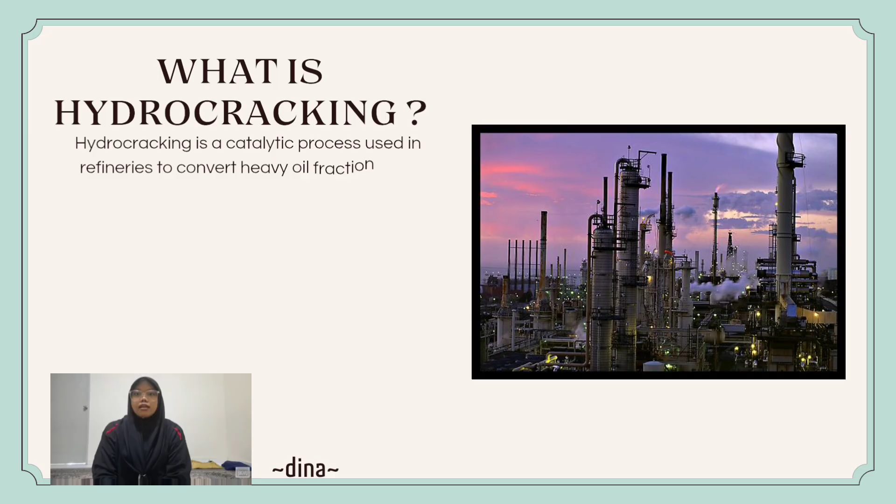Hydrocracking is a catalytic chemical process used in petroleum refining to break down large, complex hydrocarbon molecules into smaller, more valuable products such as gasoline, diesel, and jet fuel. It involves the addition of hydrogen under high pressure and temperature, which helps convert heavy oils and residues into lighter fractions. This process is essential because it helps meet the demand for cleaner fuels and optimize resource utilization. The hydrocracking unit typically consists of reactors filled with specialized catalysts that facilitate this chemical transformation efficiently.

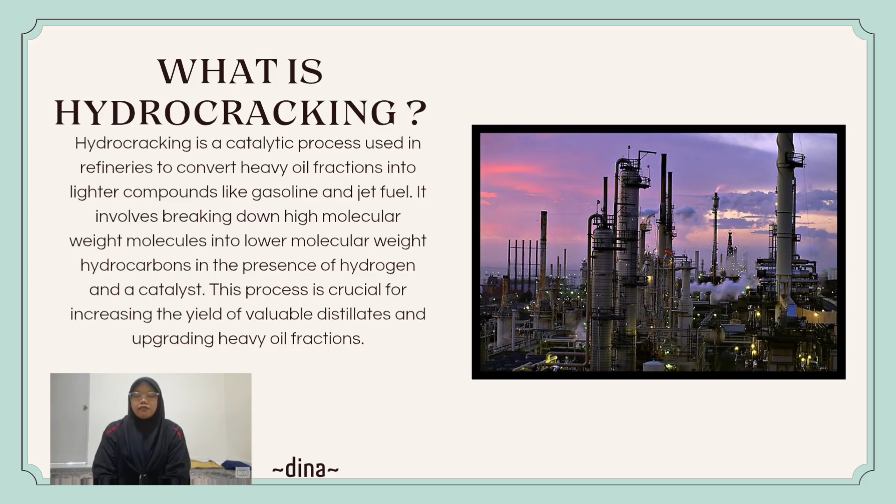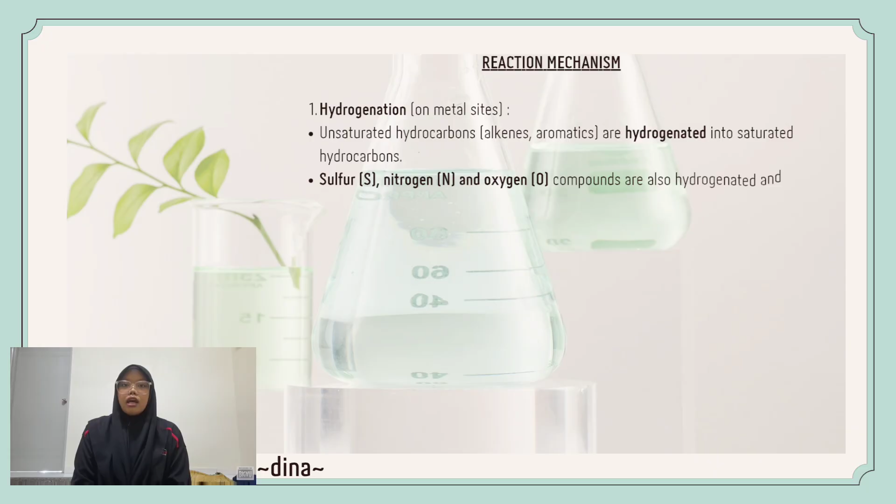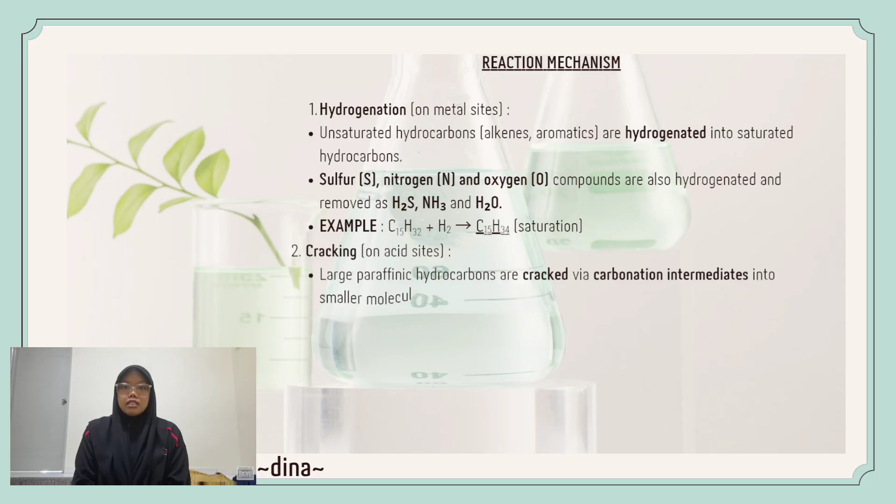For this slide, I want to explain three essential reaction mechanisms employed in the petroleum industry to enhance the properties of hydrocarbons. First, hydrogenation. Hydrogenation is the process of adding hydrogen to unsaturated hydrocarbons, which typically contain double or triple bonds. This reaction occurs in the presence of a catalyst, often a transition metal like nickel, palladium, or platinum.

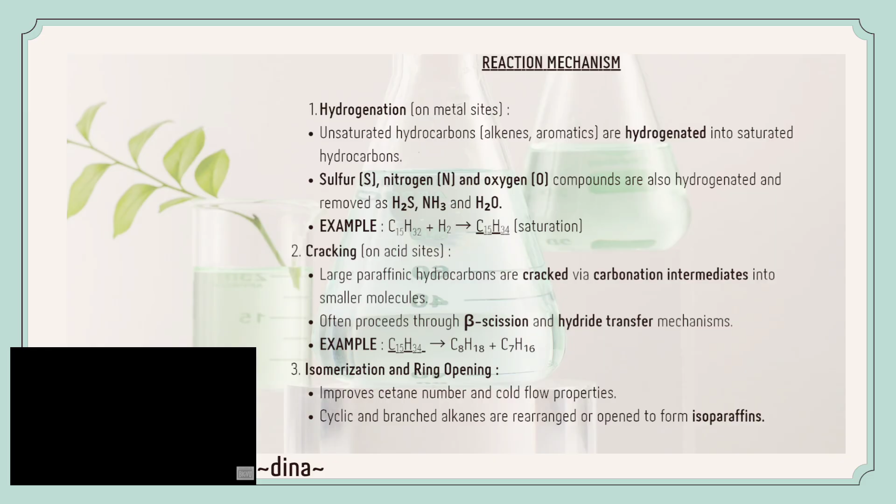The significance of hydrogenation lies in its ability to convert less stable, unsaturated hydrocarbons into more stable, saturated forms. For instance, the hydrogenation of pentene C5H10 can yield pentane C5H12. This process not only increases the stability of hydrocarbons but also improves their energy content, making them more suitable for fuel applications.

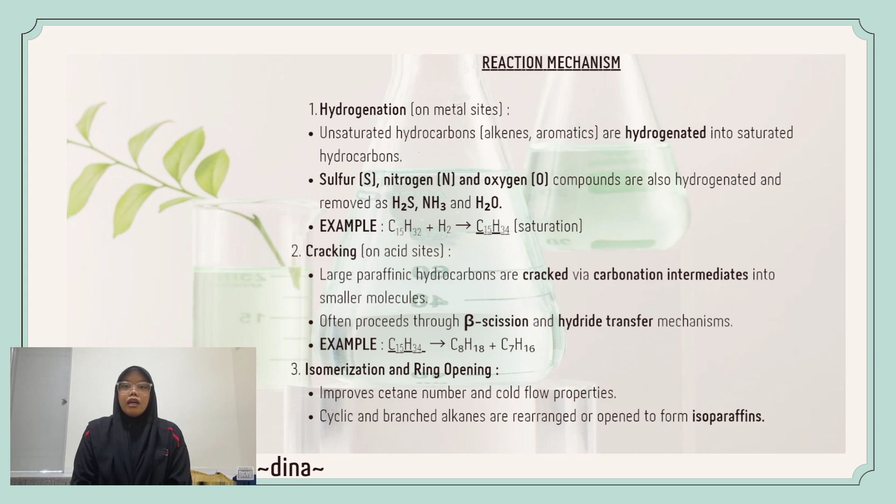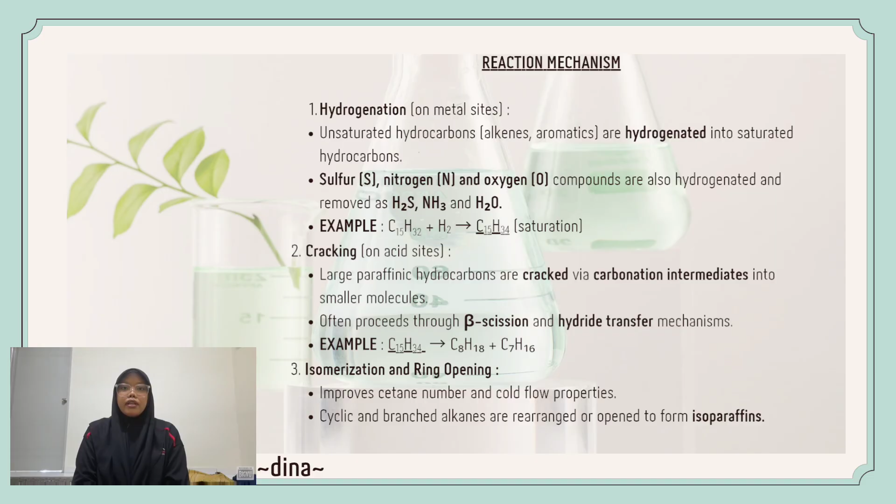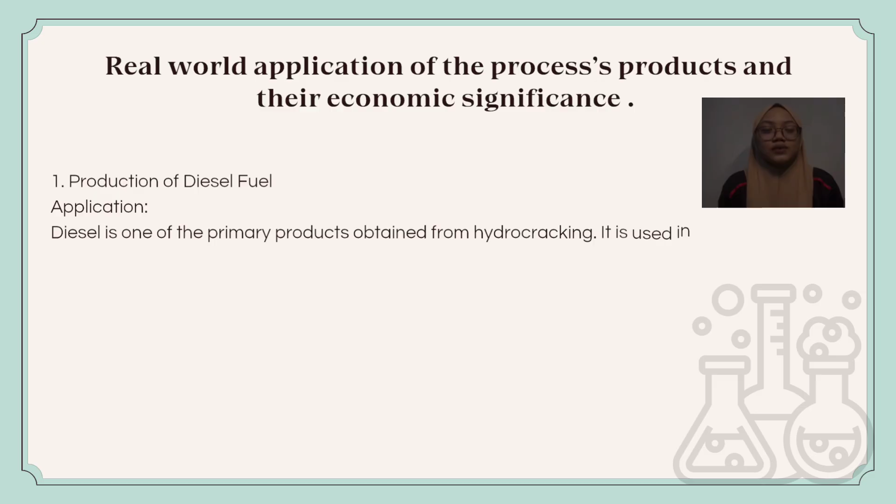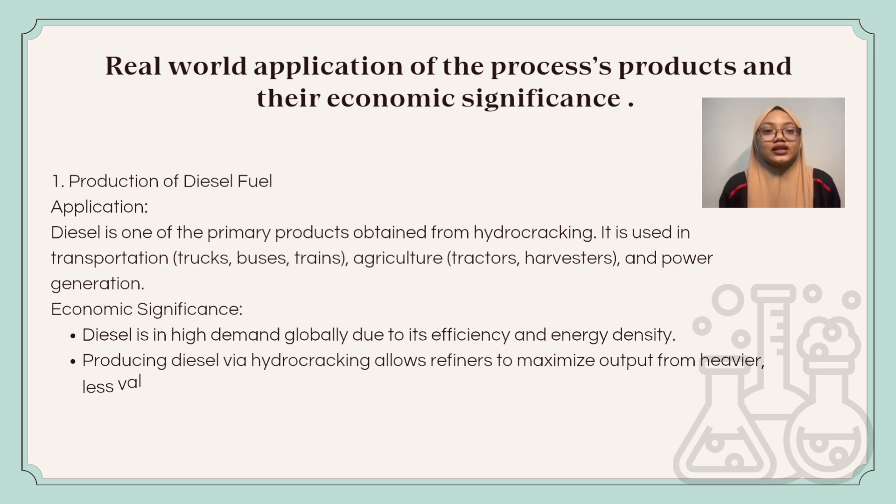Let's explore three key applications of hydrocracking products in real life and why they matter economically. First, we have diesel fuel, one of the main products of hydrocracking. Diesel is widely used in transportation such as trucks, buses, and trains. It's also essential in agriculture for powering tractors and harvesters, and even in power generation in some areas.

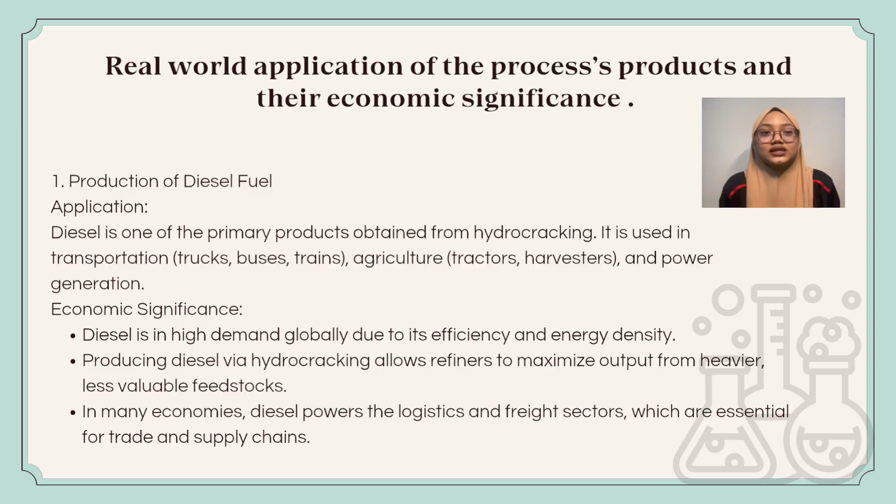Economically, diesel is in high demand around the world because of its high energy efficiency. Refining it through hydrocracking allows industry to convert heavier, low-value crude into profitable diesel. And since diesel fuels the freight and logistics sector, it plays a key role in supporting trade and supply chains globally.

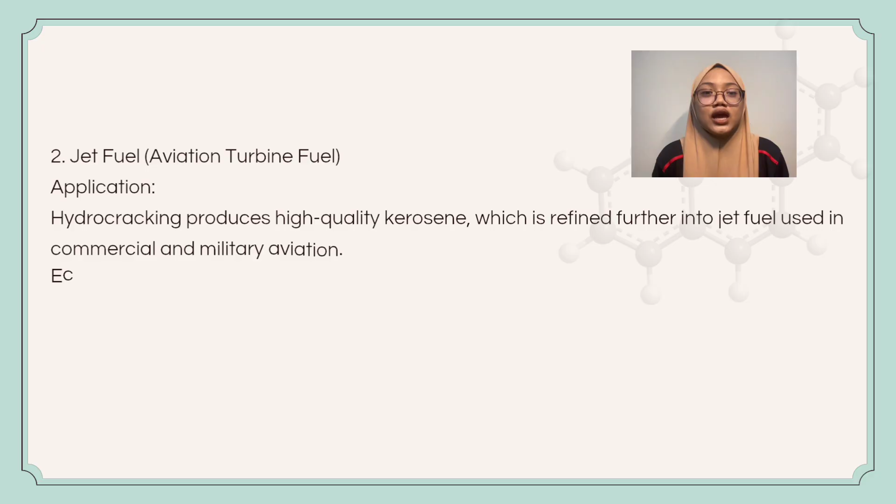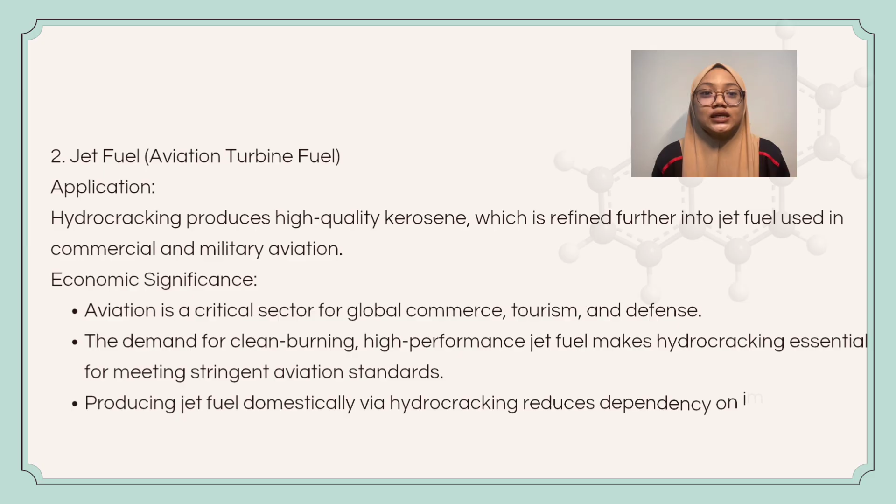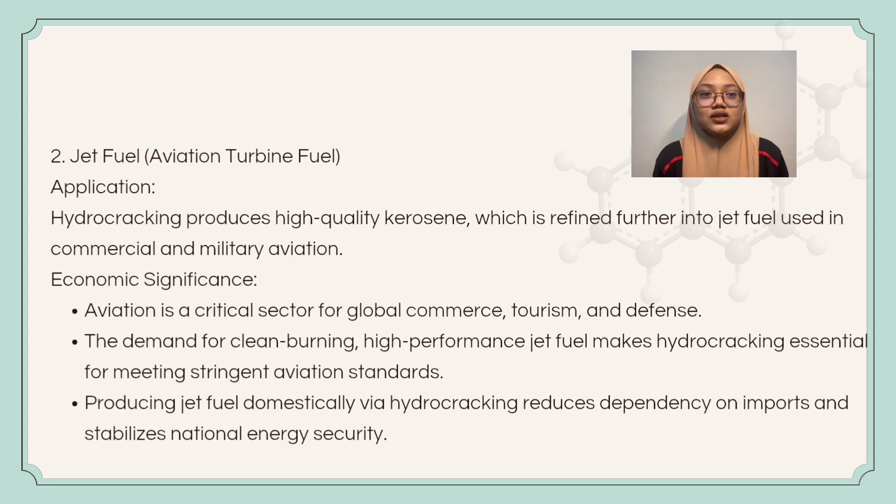Next is jet fuel, produced by refining kerosene from the hydrocracking process. Jet fuel is critical for both commercial airlines and military aviation. From an economic standpoint, the aviation industry is crucial for global commerce, tourism, and national defense. Hydrocracking provides the clean-burning, high-performance fuel that modern jet engines require, meeting strict safety and environmental standards. Producing jet fuel domestically also reduces dependence on imports and improves a country's energy security.

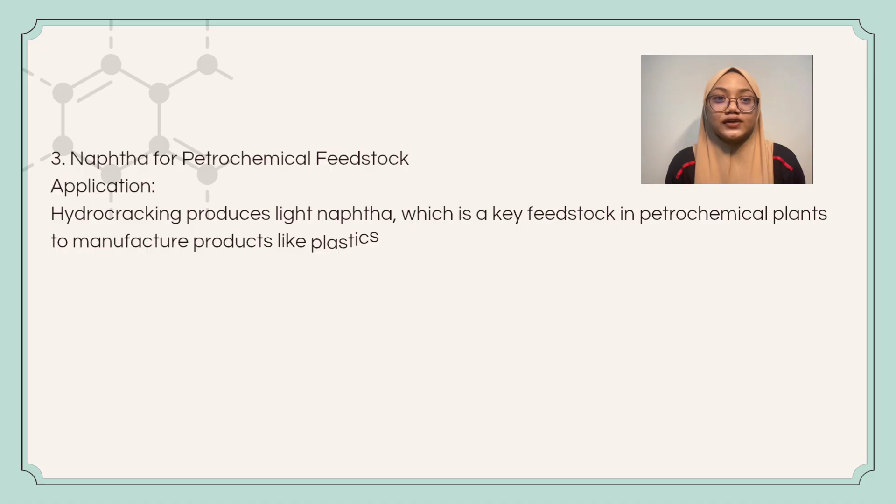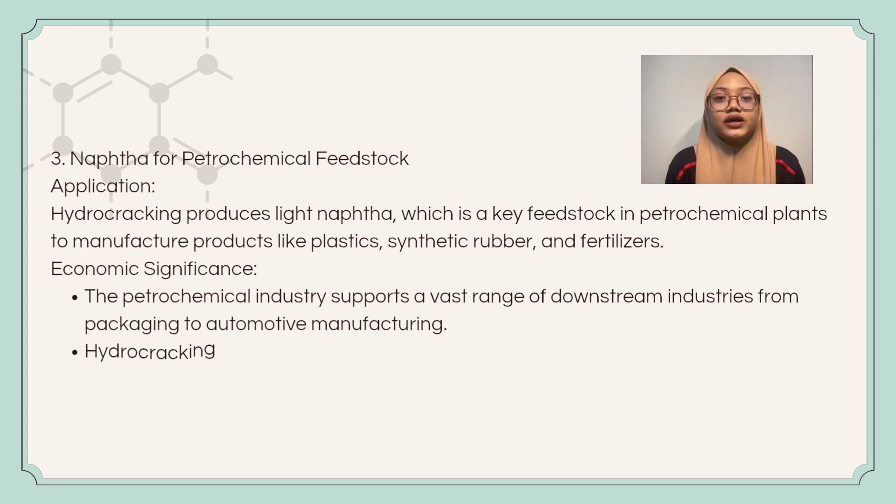The third application is naphtha, a light hydrocarbon used as a feedstock in petrochemical production. It's a building block for making plastic, synthetic rubber, and fertilizer. Economically, this is extremely important because the petrochemical industry supports countless other industries from packaging and automotive to electronics. Hydrocracking helps meet growing demand for naphtha, especially in countries with strong chemical manufacturing sectors. Converting low-value crude into high-demand chemicals adds significant economic value.

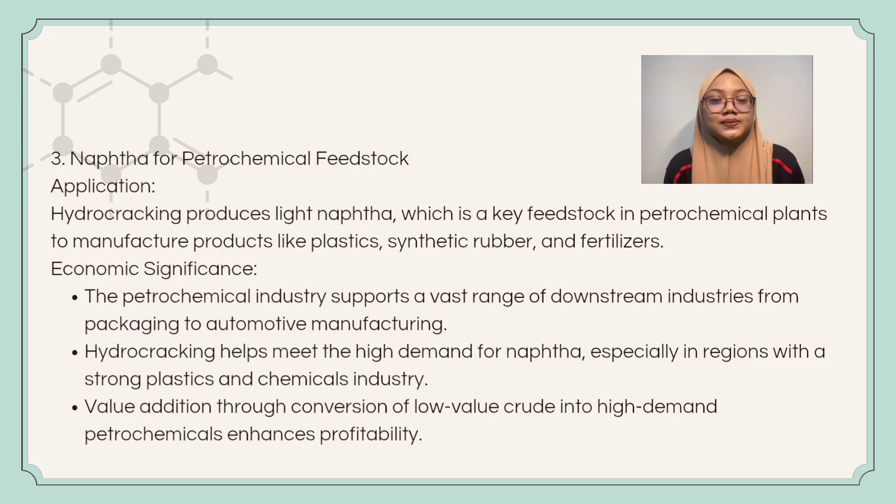Sustainability and environmental impact focus on the hydrocracking process, breaking it down into 4 main categories. Category 1 is waste generation. Minimal solid waste where the catalyst must be managed, such as disposed or regenerated. Wastewater includes ammonia, sulfides, and hydrocarbons. Byproduct gases like methane, ethane, propane, and butanes are produced but typically recovered and reused as fuel or feedstock.

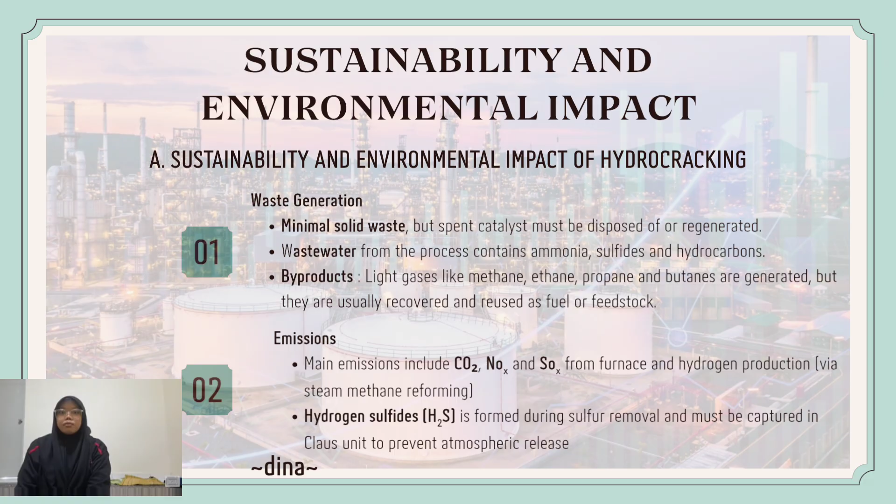Category 2, emissions. Major emissions, CO2 and H2S formed during sulfur removal must be captured in Claus units to prevent environmental release.

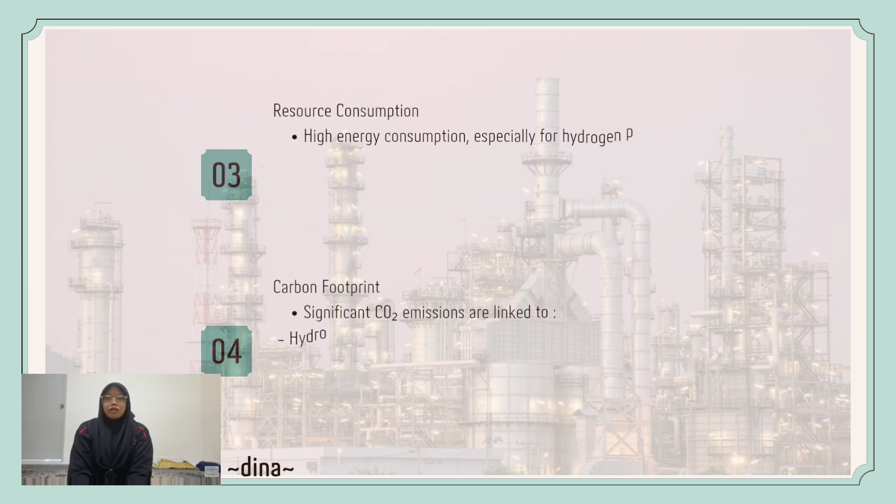Category 3, resource consumption. High energy consumption for hydrogen production and heating processes requires large volumes of water and cooling utilities, and a strong dependence on non-renewable feedstocks such as vacuum gas oil and residue oil.

Category 4, carbon footprint. Major CO2 emissions arise from hydrogen production, often fossil fuel-based, combustion in heaters, and use of fuels, especially in engine combustion.

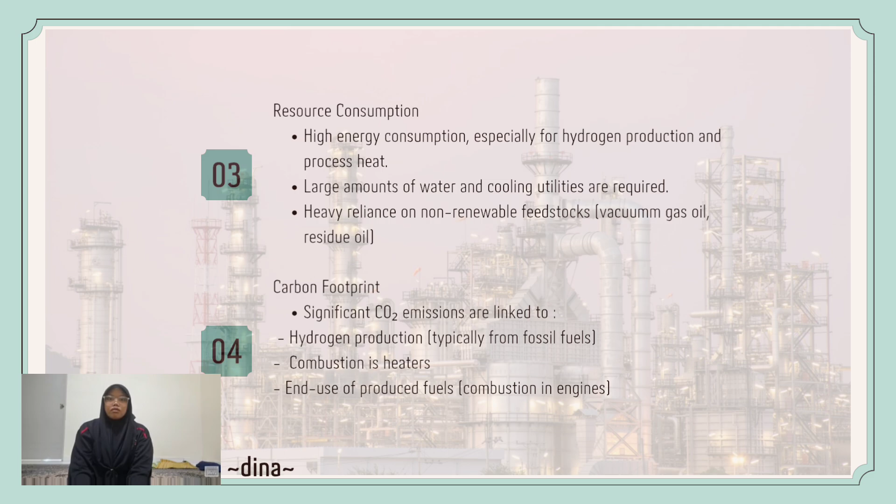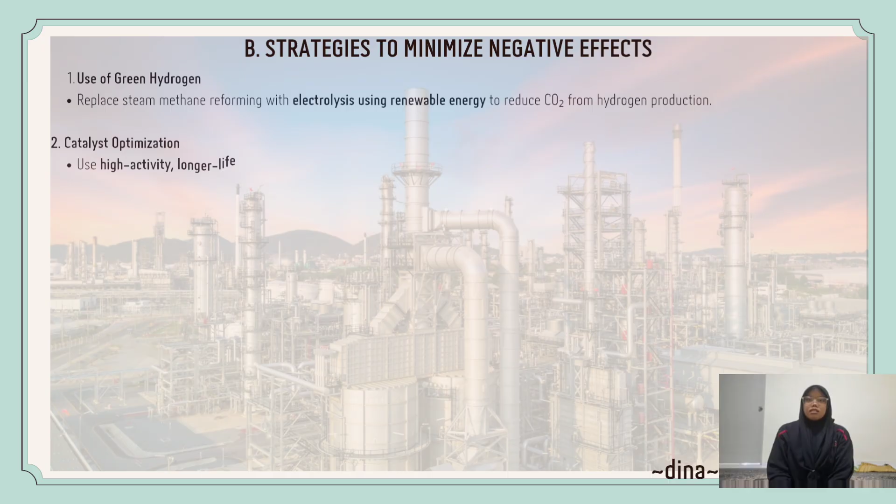This slide outlines strategies to minimize the negative environmental effects of hydrocracking. First, use of green hydrogen. Replace steam methane reforming with electrolysis powered by renewable energy to reduce CO2 emissions from hydrogen production. Number 2, catalyst optimization. Use high-activity, long-life catalysts to reduce regeneration frequency and waste. Recycle valuable metals such as nickel, molybdenum, and platinum from spent catalysts.

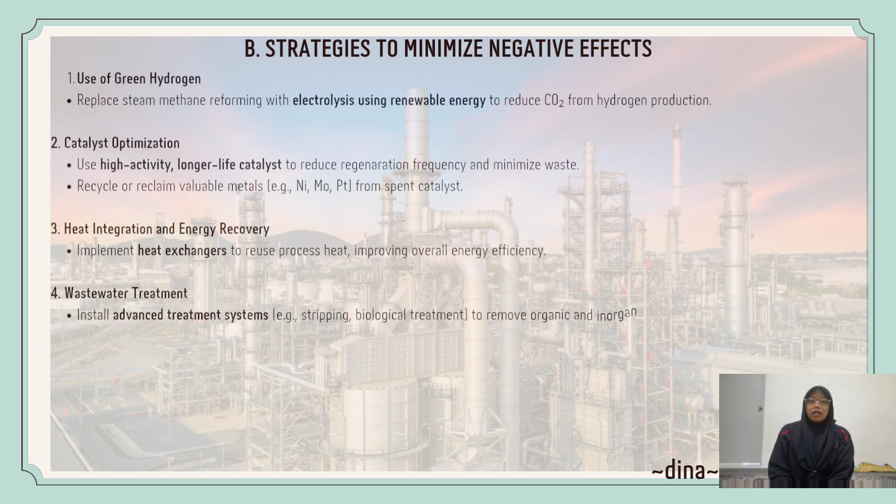Number 3, heat integration and energy recovery. Install heat exchangers to reuse process heat, increasing energy efficiency. Number 4, wastewater treatment. Apply advanced systems, for example stripping and biological treatment, to remove contaminants before discharge.

Number 5, CO2 capture technologies. Use carbon capture and storage (CCS) or carbon utilization to lower plant emissions. Number 6, feedstock diversification. Explore renewable feedstocks like bio-oils or used lubricants to reduce dependence on fossil-based inputs.

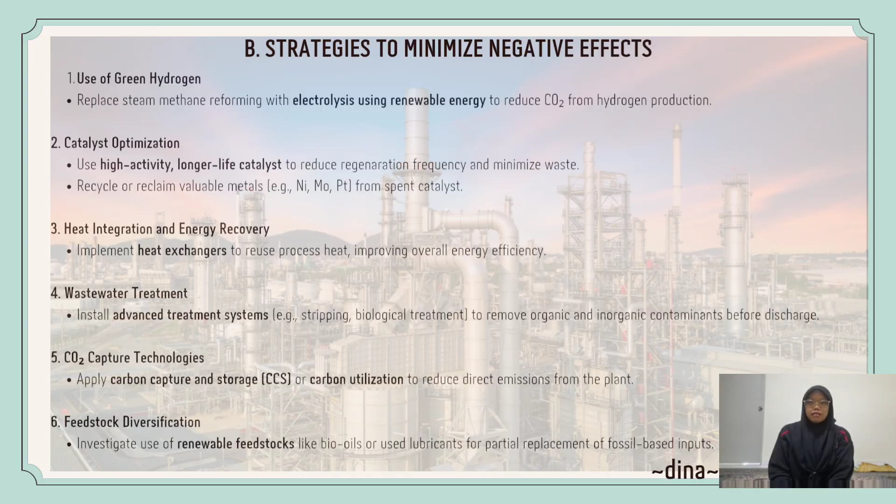33DPE24F1031. So now I will continue about the hydrocracking process for health, safety and legal consideration.

For health and safety consideration, first, chemical exposure. The process uses high pressure hydrogen and various catalysts which can be hazardous. Workers may be exposed to hazardous chemicals, so proper handling and storage protocols are essential to prevent leaks and exposure. Also, monitoring air quality and using appropriate PPE are essential.

Number 2, high pressure hazard. The process operates under high pressure and temperature, requiring robust equipment design and maintenance to prevent accidents.

Number 3, noise exposure. Equipment can generate significant noise which may affect hearing. Due to this, implementing noise control measures and providing hearing protection is important.

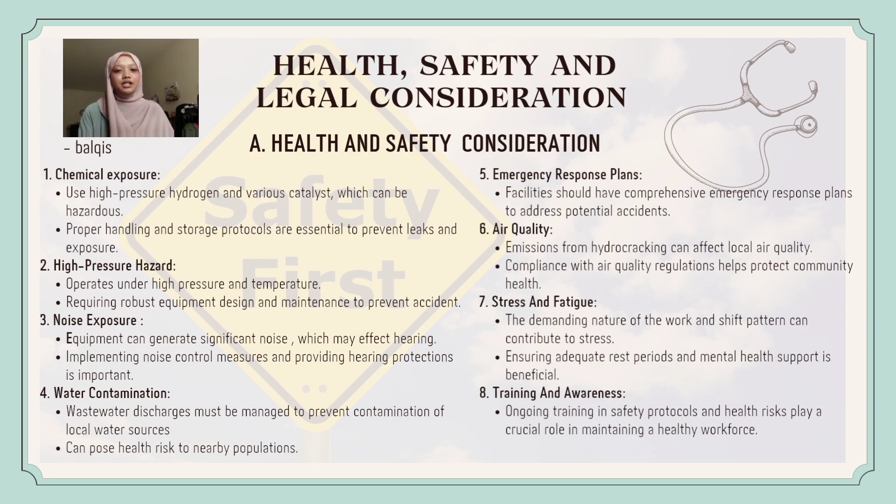Number 7, stress and fatigue. The demanding nature of the work and shift patterns can contribute to stress. Ensuring adequate rest periods and mental health support is beneficial.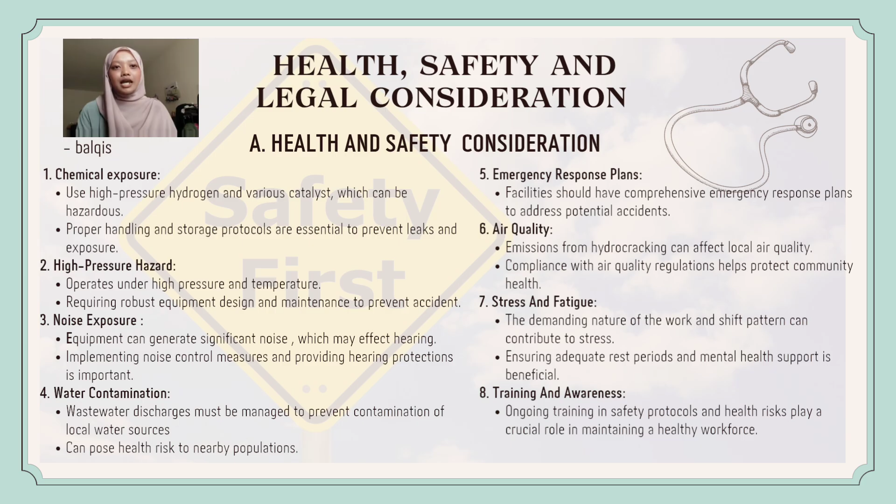Number 8, training and awareness. Ongoing training in safety protocols and health risks plays a crucial role in maintaining a healthy workforce.

Now about legal consideration. Number 1, regulatory compliance. Facilities must comply with regulations from agencies such as the Environmental Protection Agency (EPA) and Occupational Safety and Health Administration (OSHA).

Number 2, licensing and permits. Operating permits are often required and facilities must undergo inspection to ensure compliance with safety and environmental regulations.

Number 3, reporting requirements. Incidents involving hazardous materials or emissions must be reported to regulatory bodies as per legal requirements.

Number 4, process safety management (PSM). Following PSM guidelines helps in identifying, evaluating and controlling hazards associated with processes involving highly hazardous chemicals.

Number 5, API standards. The American Petroleum Institute (API) provides standards that guide safe practice in hydrocracking and related processes.

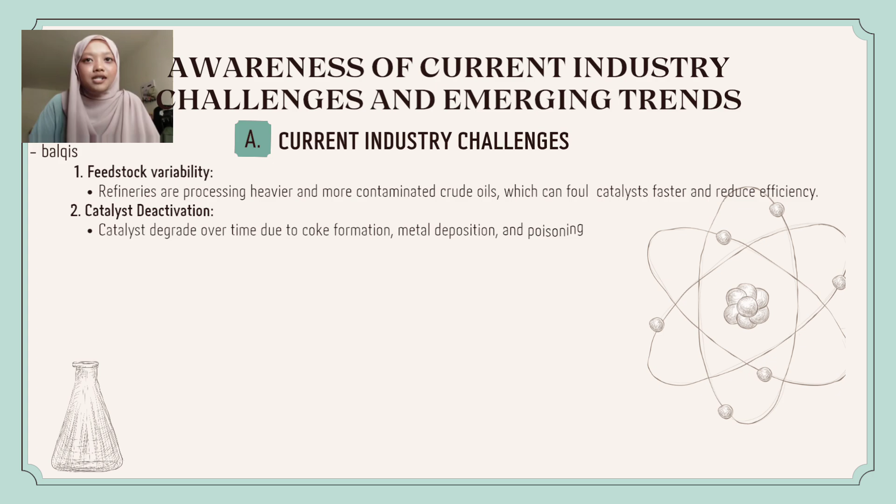About current industry challenges, firstly, feedstock variability. Refineries are processing heavier and more contaminated crude oils, which can foul catalysts faster and reduce efficiency.

Next, catalyst deactivation. Catalysts degrade over time due to coke formation, metal deposition, and poisoning, for example by sulfur and nitrogen compounds. Frequent regeneration or replacement increases operational costs.

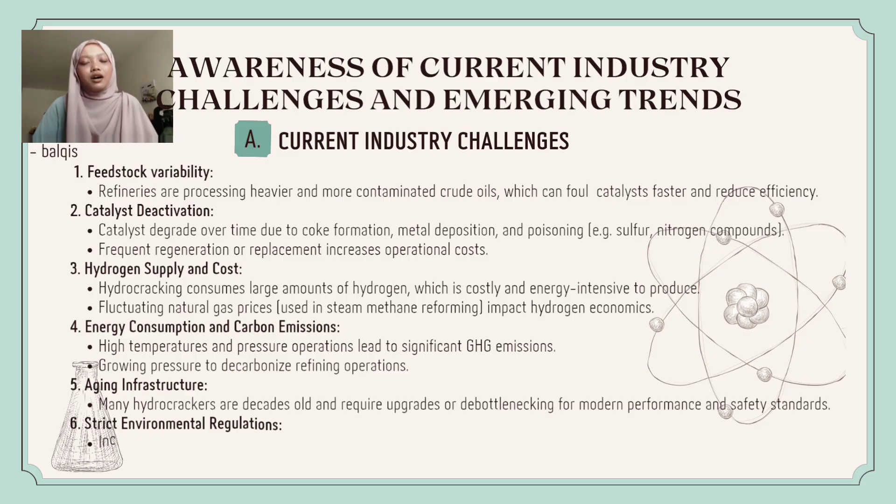Number 3, hydrogen supply and cost. Hydrocracking consumes large amounts of hydrogen, which is costly and energy intensive to produce. Fluctuating natural gas prices used in steam methane reforming impact hydrogen economics.

Number 4, energy consumption and carbon emission. High temperatures and pressure operations lead to significant GHG emissions. GHG stands for greenhouse gases, which include water vapor, carbon dioxide, methane, and nitrous oxide.

Number 5, aging infrastructure. Many hydrocrackers are decades old and require upgrades or debottlenecking for modern performance and safety standards.

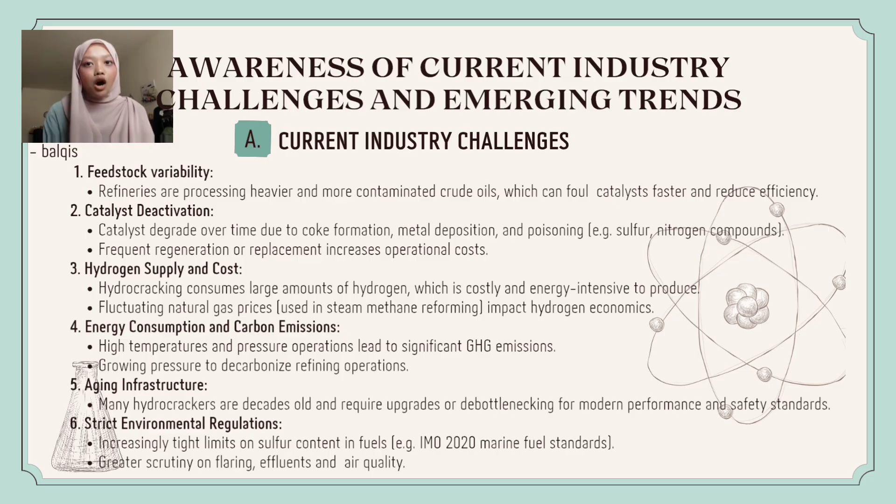Number 6, lastly, strict environmental regulations. Increasingly tight limits on sulfur content in fuel, for example IMO 2020 marine fuel standards, and greater scrutiny on flaring, effluent, and air quality.

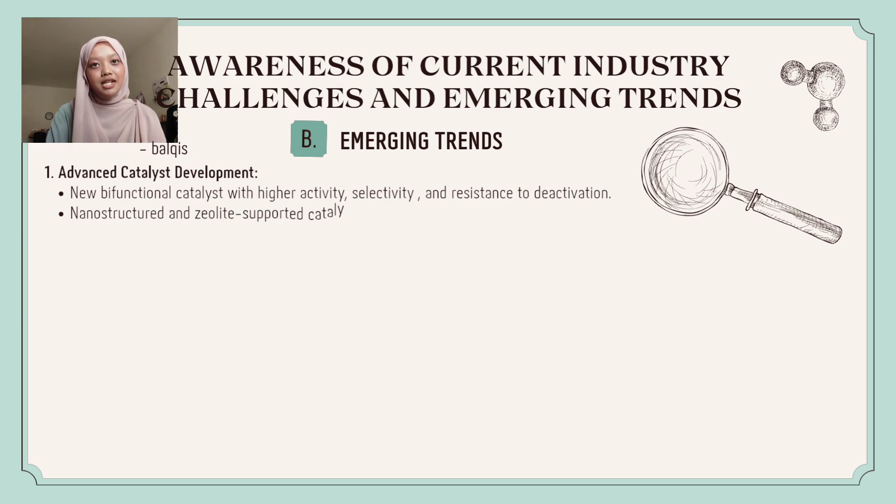So now I will talk about emerging trends. First, advanced catalyst development. New bifunctional catalysts with higher activity, selectivity, and resistance to deactivation. Nanostructured and zeolite supported catalysts are gaining interest.

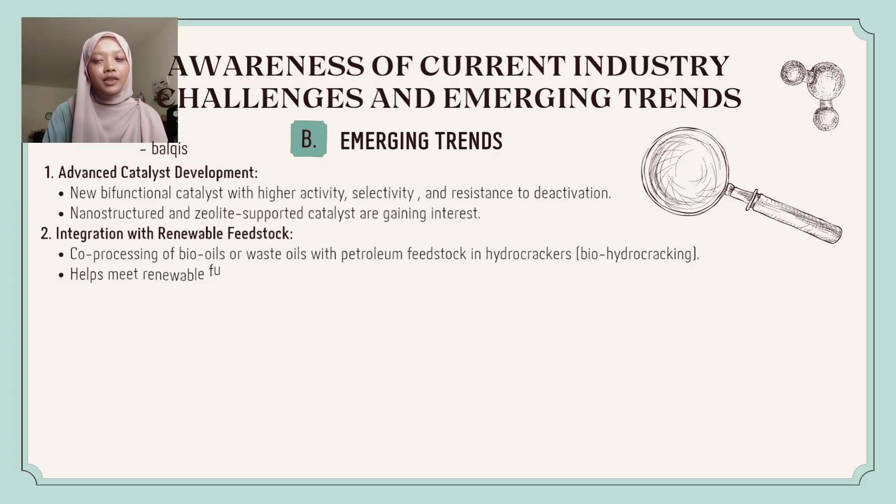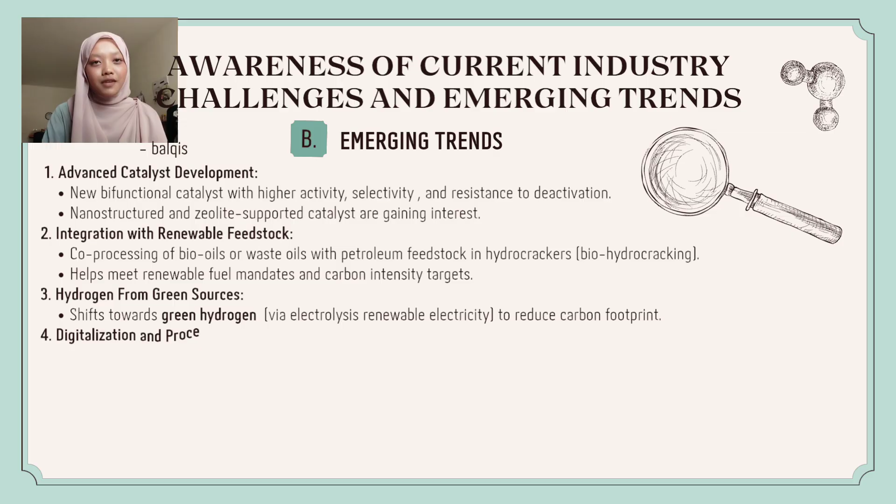Number 2, integration with renewable feedstock. Co-processing of bio-oils and waste oils with petroleum feedstock in hydrocrackers, or biohydrocracking, helps meet renewable fuel mandates and carbon intensity targets.

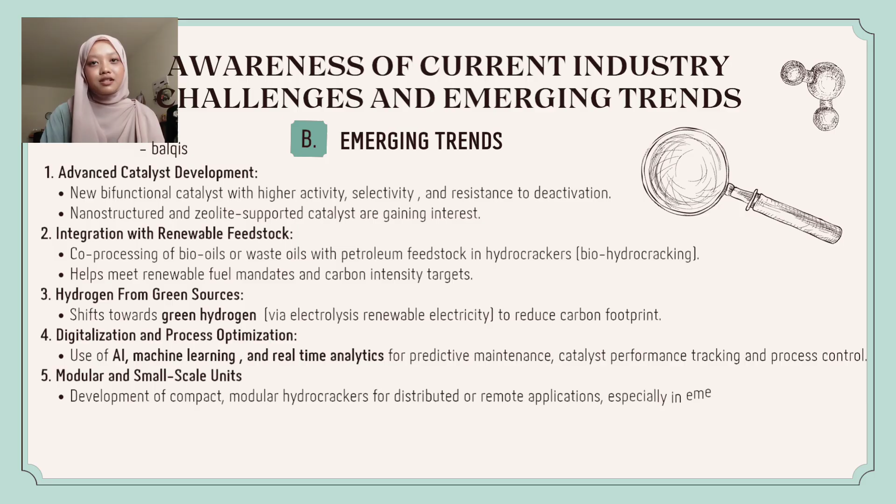Next, hydrogen from green sources. A shift towards green hydrogen via electrolysis with renewable electricity to reduce carbon footprint.

Number 4, digitalization and process optimization. Use of AI, machine learning, and real-time analytics for predictive maintenance, catalyst performance tracking and process control.

Number 5, modular and small-scale units. Development of compact modular hydrocrackers for distributed or remote applications, especially in emerging markets.

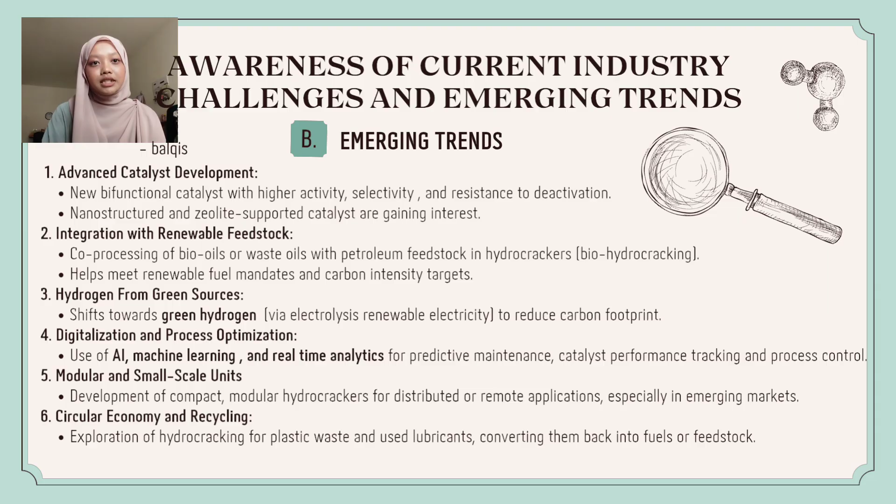Lastly, circular economy and recycling. Exploration of hydrocracking for plastic waste and used lubricants, converting them back into fuels or feedstock.

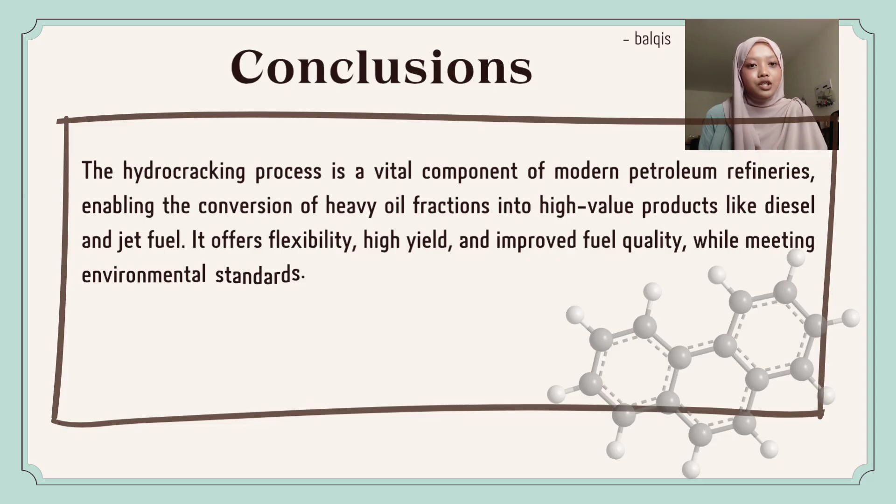In conclusion, the hydrocracking process is a vital component of modern petroleum refineries, enabling the conversion of heavy oil fractions into high-value products like diesel and jet fuel. It offers flexibility, high yield, and improved fuel quality while meeting environmental standards.

However, it requires strict adherence to safety, health, and environmental regulations due to its use of high pressures, temperatures, and hazardous chemicals. Overall, hydrocracking enhances refinery efficiency and product value while demanding robust operational controls.